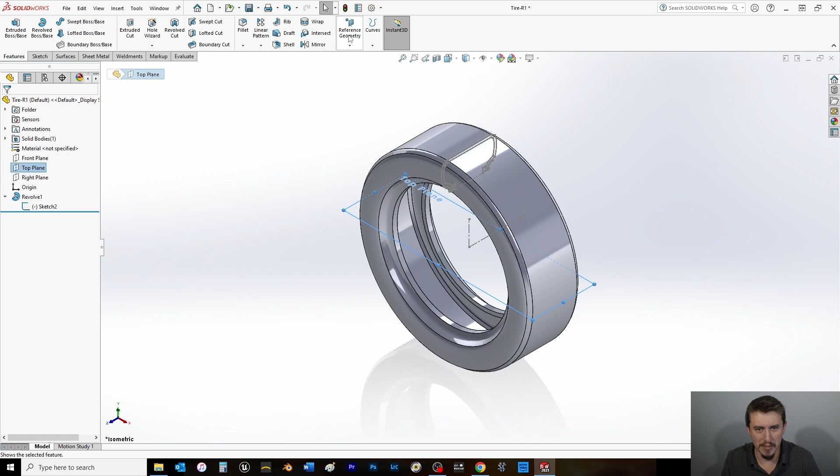Alright, so what we're going to do here is a little bit of tinkering with the wrap feature. So what we'll do is take the top plane, show the sketch, select the top plane from the feature tree, reference geometry, auxiliary plane, at this point here, Control 8 to bring it normal to, and let's make some tread.

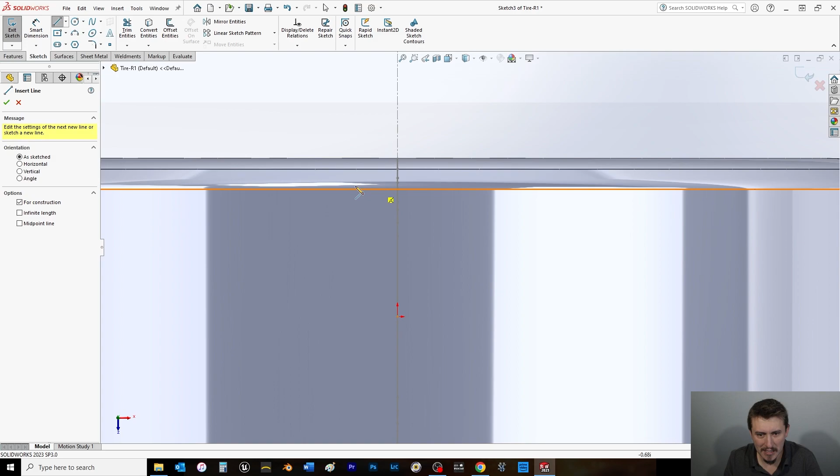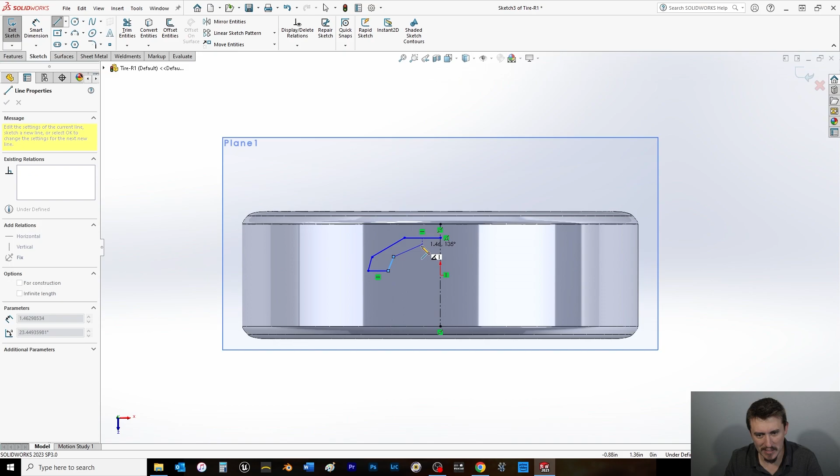First, we'll do a center line. And actually, what I'm going to do real quick is hide sketch 2 because I no longer need it or want it. Center line from here to here, like such. And then we'll do something like, how's about, say here to here to here to here. We'll fix that in just a moment. Don't you worry. And of course the line here, we gotta have a closed contour.

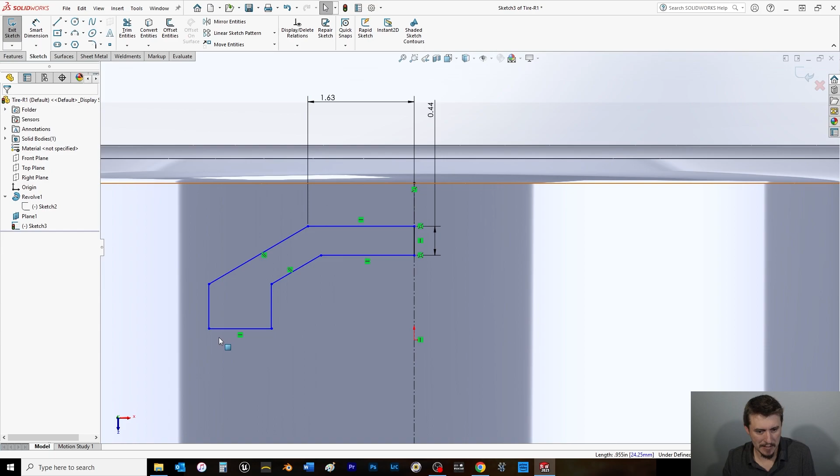Alright, so let's just say we'll just go 0.44. Make these equal. These can be a horizontal relation. Let's say these two are equal.

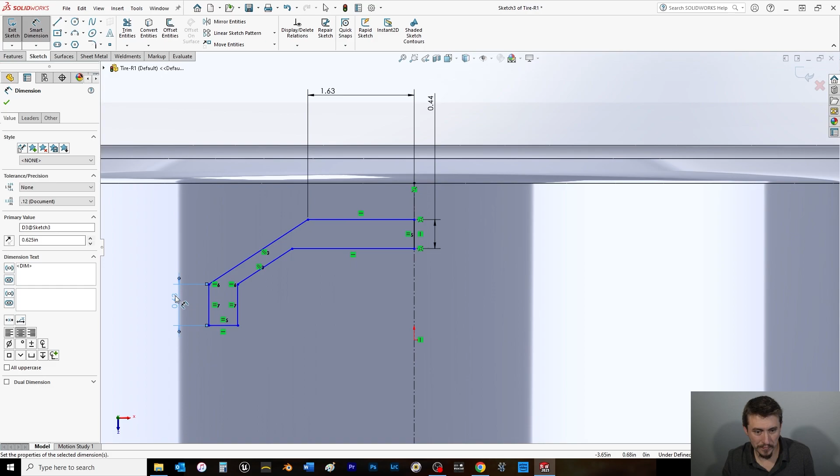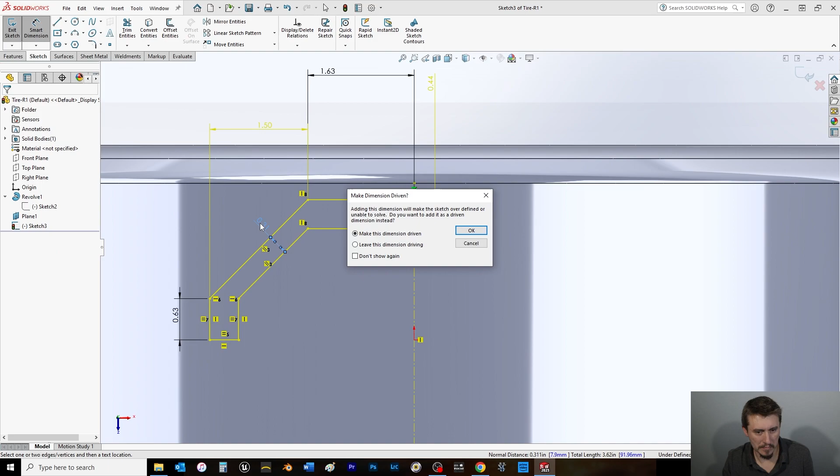Now we're getting somewhere. It used to be vertical. Vertical. Alright, now that we have this in place, we should be able to

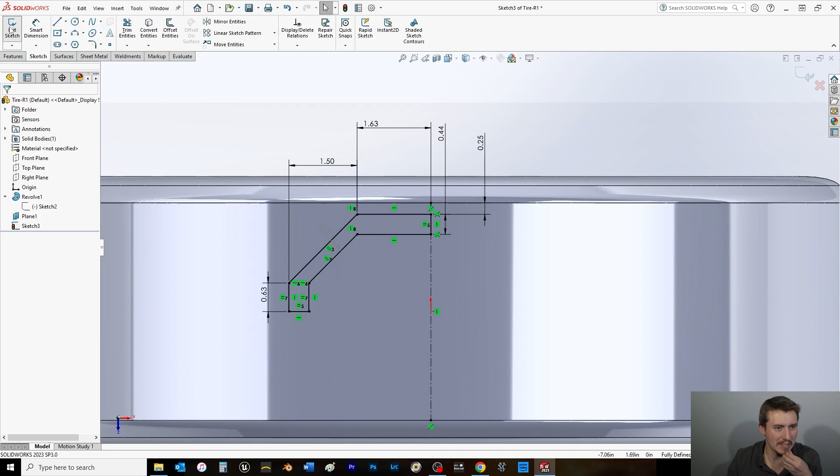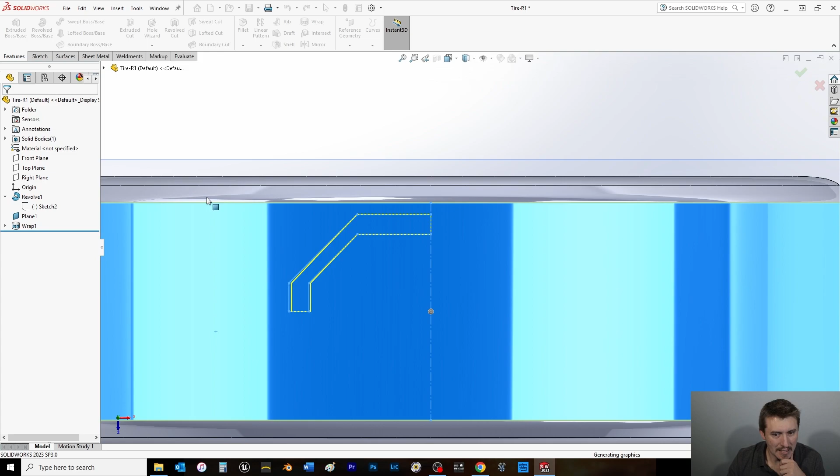go from here. We're going to do a quick test of how it goes. Exit the sketch, choose the sketch, come over to the features, wrap it, choose this face, looking good. We're going to extrude it. Should be emboss versus deboss. Point 25. Select OK, because we want a wrapped contour.

So in my previous video on Friday, I went over the wrap feature in greater detail. So check that video out. It's under the playlist, the unofficial tutorial section. But that's what we're implementing here, which is why I held off on doing this part to get this first.

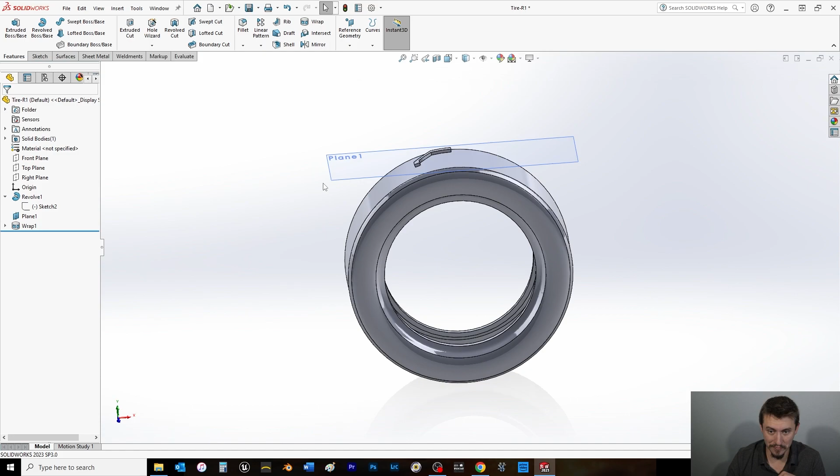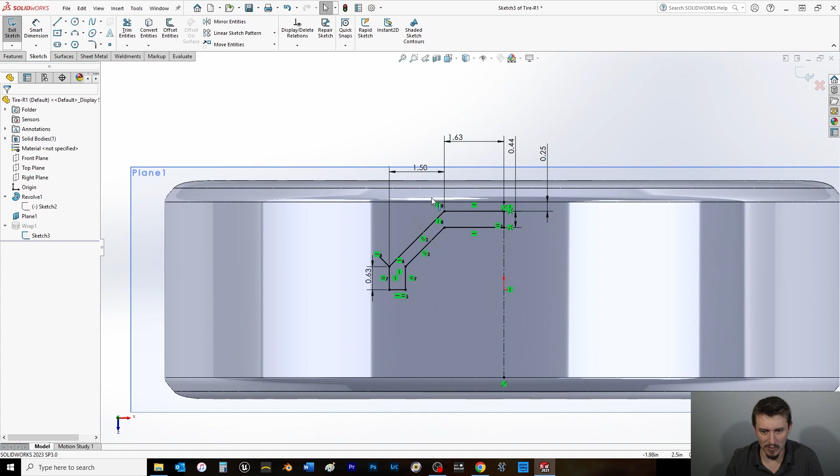So what we're going to do here is bring plane 1, Control 8. Plane 1 was not selected. Control 8 to bring it back normal to. So let's tune up this sketch a bit. This is a little wonky, if I'm being real here. So what I'm going to do, well, I mean, it's not terrible. So check this out.

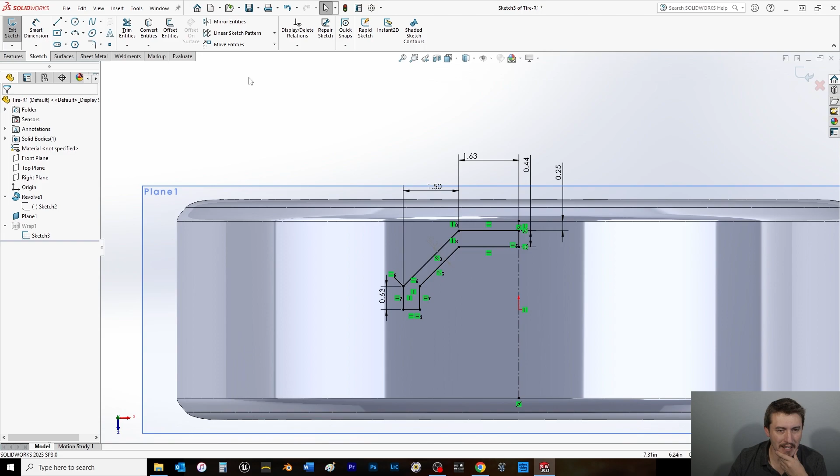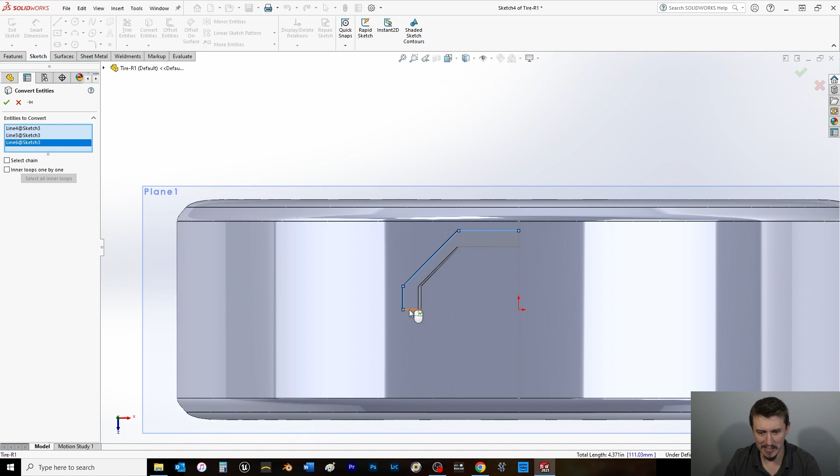Let's exit the sketch, choose plane 1, choose a sketch, and then what we'll do is make sketch 3 visible for this, and then we're going to do some funky ghetto borrowing here, right? So I'm going to convert entities, select this sketch. You'll see what I'm going to do here. And then click OK, and then here we're going to take a center line. This can go to infinity or the silhouette edge of the tire, it won't matter.

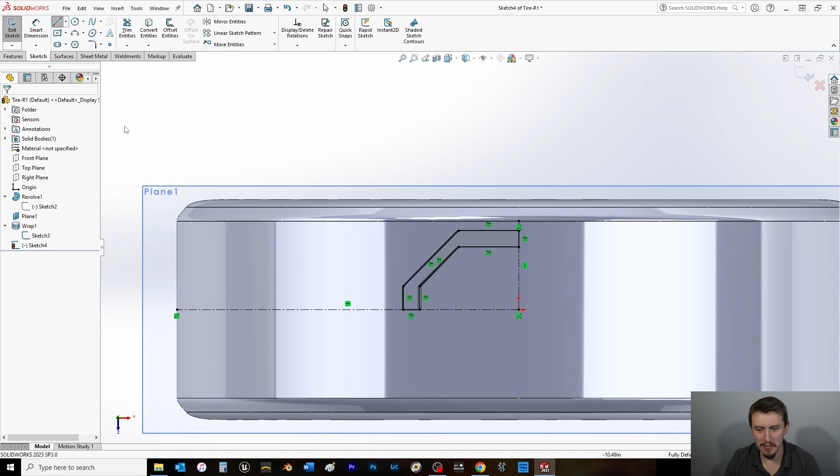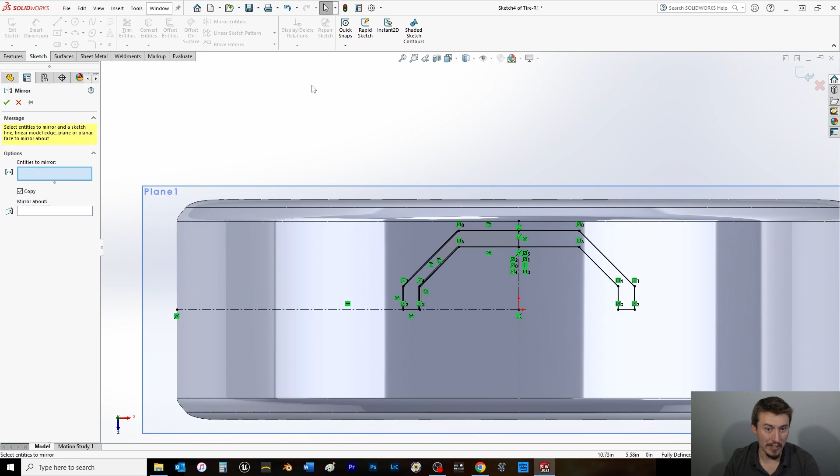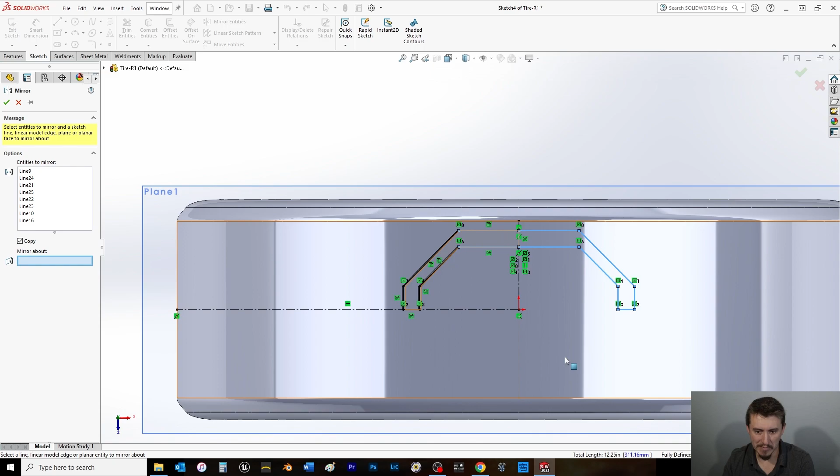And then I'm going to do 2 things here. Copy dot flip, so to speak. So we're going to mirror the entity, right, about, we don't want line 19 though, because we're mirroring about that. Okay, further, not yet, then we're going to do another mirror, select all these, select this. Oh, we don't want those 2 lines. No, sorry. Gotta make sure I'm in the right selection process here. I want this one and this one. And merged them, fine. I will deal with you accordingly.

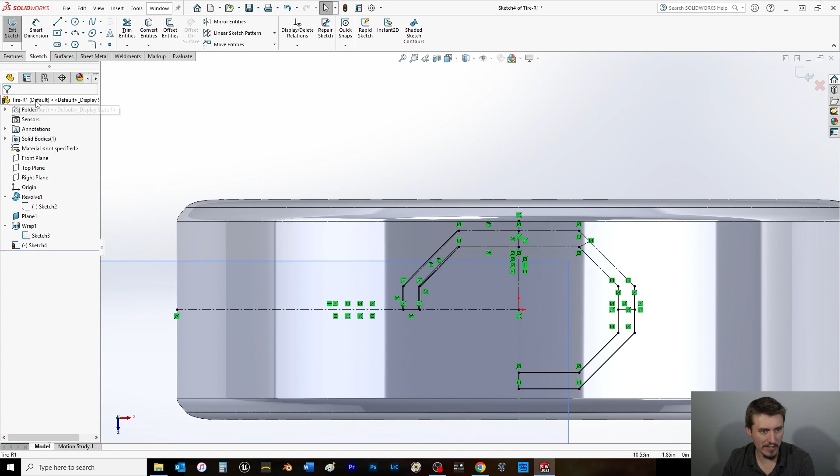Then we're going to take a trim entities here. And then I'm going to take all of this here and make it for construction. We need to get these 2 lines. I'm actually just going to straight up remove those for this particular purpose. Select this here. This is a quick and dirty way of doing it.

I have a lot more tutorials where we're going to refine processes, but in these Monday and Wednesday videos, don't expect me to use the exact correct way, because I want you to stay tuned for my Friday videos where we really deep dive into how to do certain sketches, relations, etc.

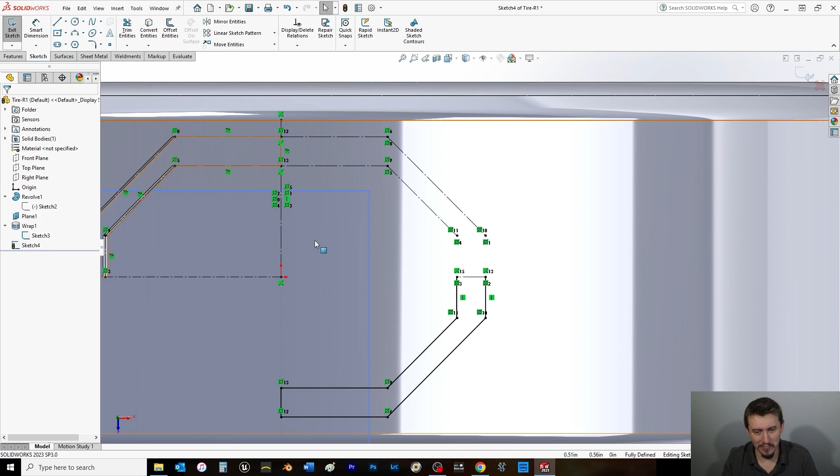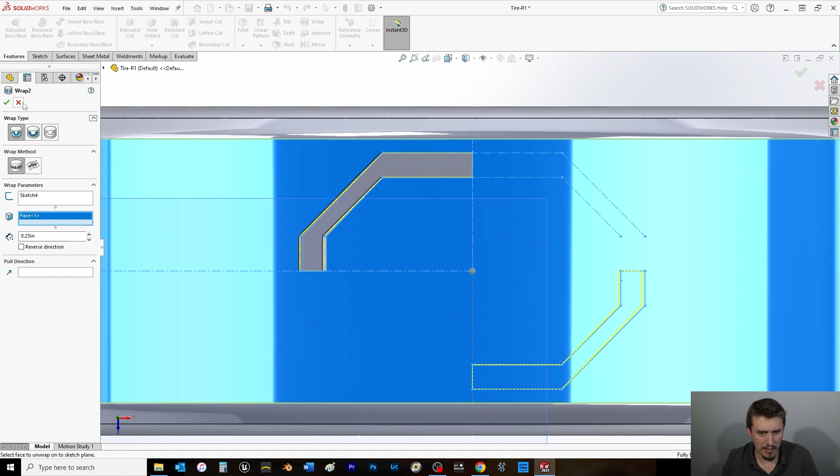So, go with this. All this should be good to go. And from here we can exit out because we have to do this again. And we're going to wrap. We're going to choose this here. Nope, we don't want to do that because it appears

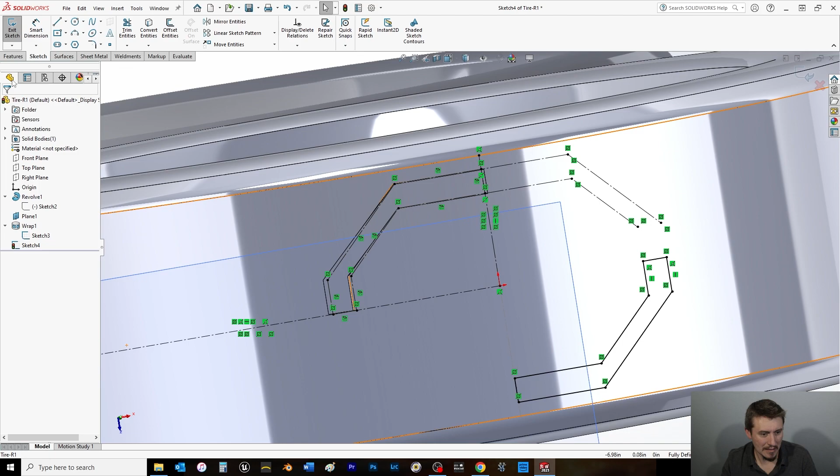Okay, just want to make sure that no other sketch is. Okay, so these are center lines. Should not choose that for wrap. But let's be sure of that. There we go. Ooh.

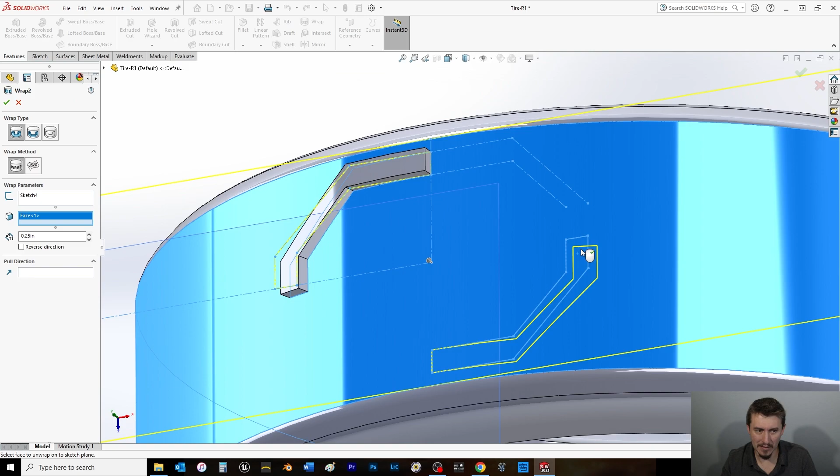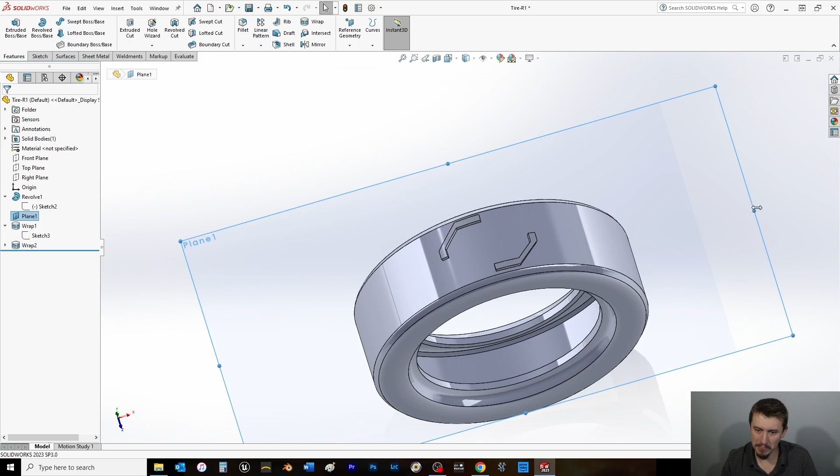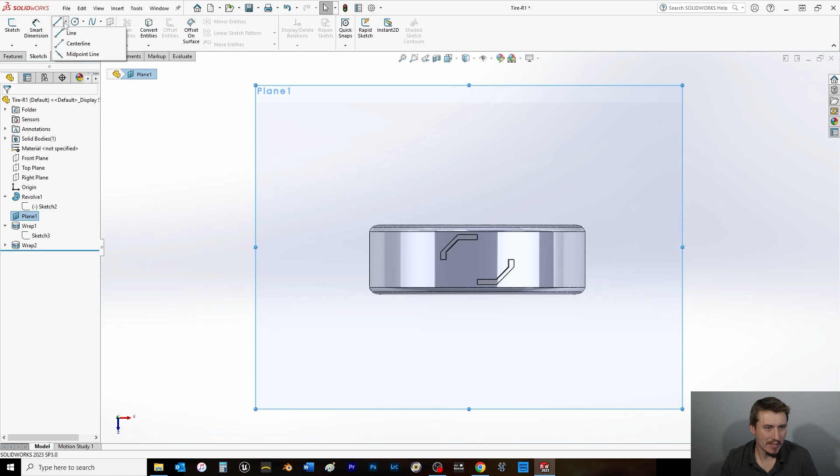Alright, so let's stretch the plane way out here, because we're going to use it again. We're going to bring it normal too, and then let's do a sketch as such. Do another center line. We'll do it off of these two pieces of tread here, and then we'll do something to the effect of a midpoint line. Why don't we do a diagonal contour, something like this. We're going to make that also a center line. And then from here, what we're going to do

is we're going to take a brief pause so I can grab a notepad. Alright, and we're back. I had to get some paper and a pen that worked so I could do some slight calculations in my head, so to speak.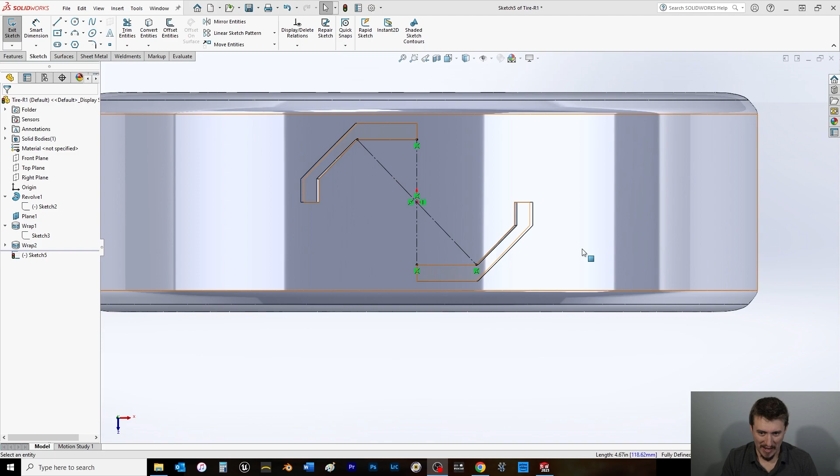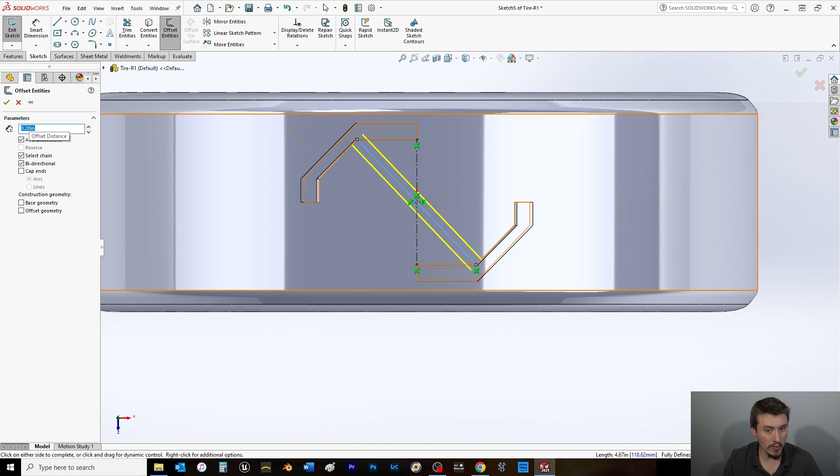Now what we'll do from here is, let's offset this, and let's go 0.4 on that as well. Did I? No, sorry. Let's do 0.4, so that's 0.2 because it's a dual offset. Okay, and then we're going to create a line here, and then we will simply mirror it, select the center line. No, we will not do that because we cannot. We need a diagonal line to do that. I can fix that.

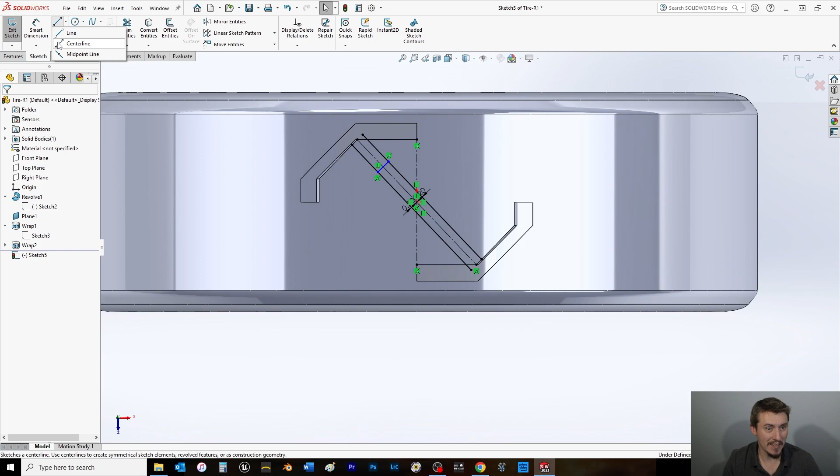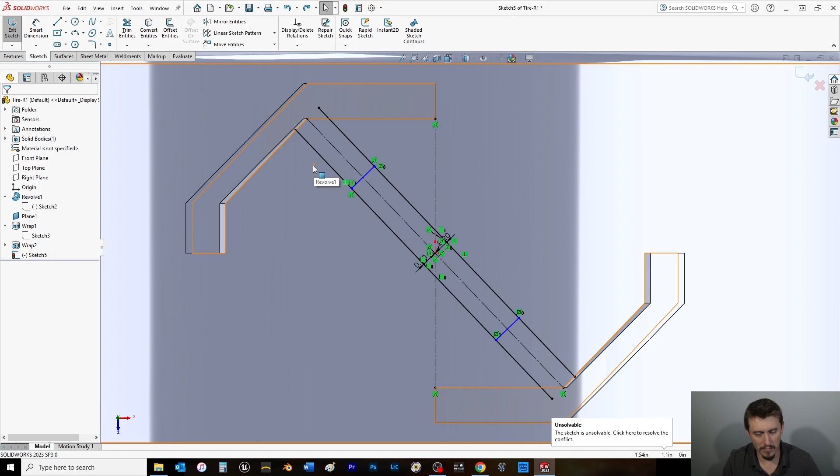So we choose a midpoint line, choose the midpoint, and go diagonally as such. Make that a center line. Then we go up here to mirror. Then we choose that. There we go. And then what we're going to further do is just love the trim entity feature. I don't want to trim the center line. What do we have going on here? Oh, let's do this first. Catch the dimension this way and make it 1.25.

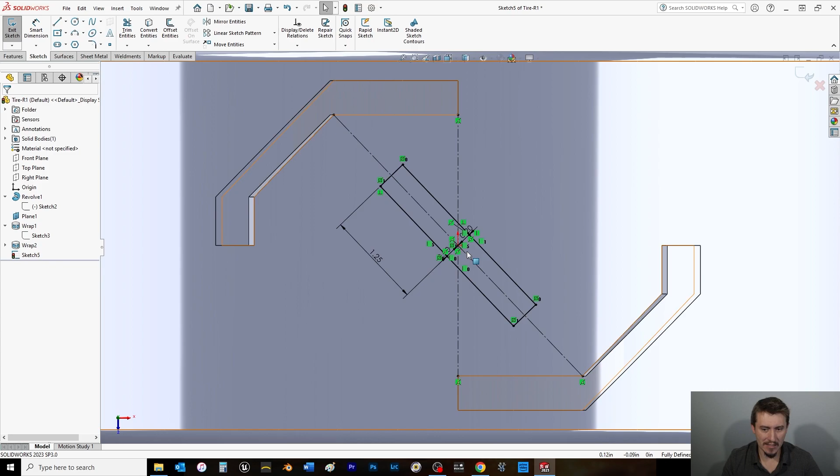Then mirror this about our center line we created. Trim the entity. Oh, I know you're not liking that right now. There you go. Now you love it. Now it's fantastic. Good, we got a closed contour. Excellent. That's for construction. We want that.

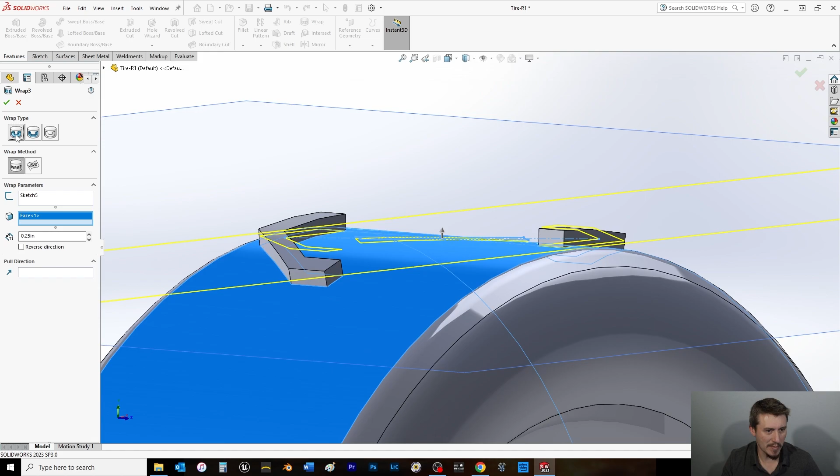We will exit the sketch, come to the feature tab, wrap it, select the sketch. 0.25. Make sure we're on the, we should have emboss and deboss. So this should be emboss. Perfect. Okay. So we've got a wild tread pattern, a very basic one. Let's hide the plane here for a moment. Then we're going to choose the

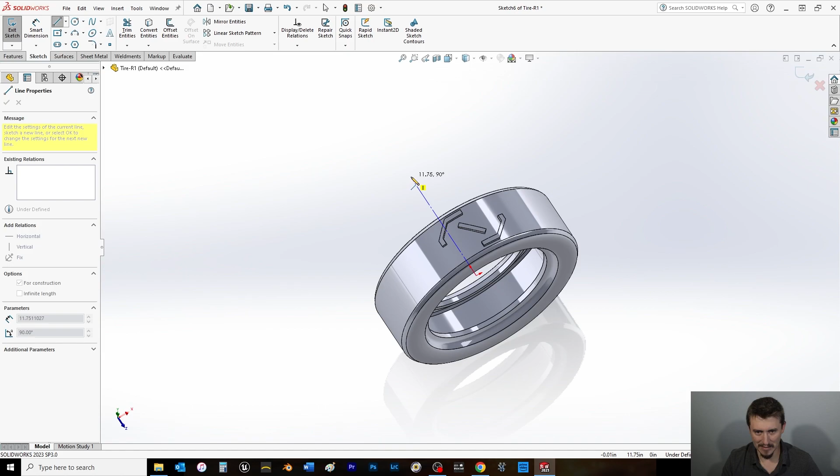top plane, do a sketch, and I'm going to do this from this kind of isometric. Make sure it's vertical. Now again, Control-8 to bring it normal to make sure that this is in fact a vertical relation. Infinite, fine with that. Exit that. Now we'll go to the features. Now what we're going to choose is a circular pattern. And now is where we're going to really break things.

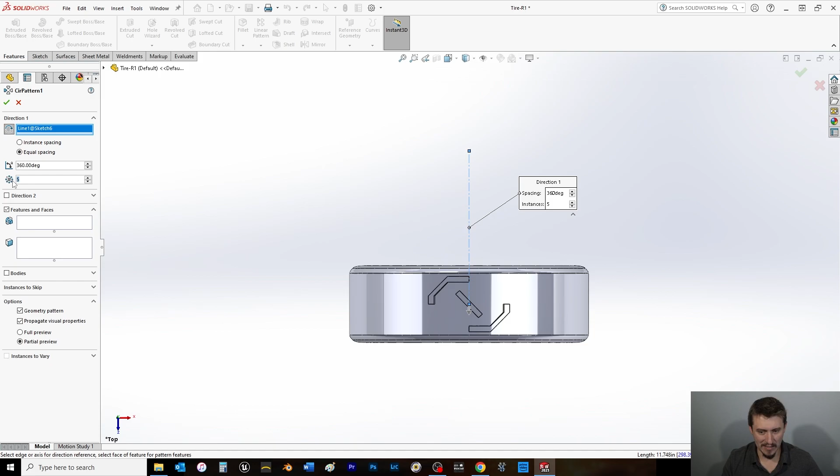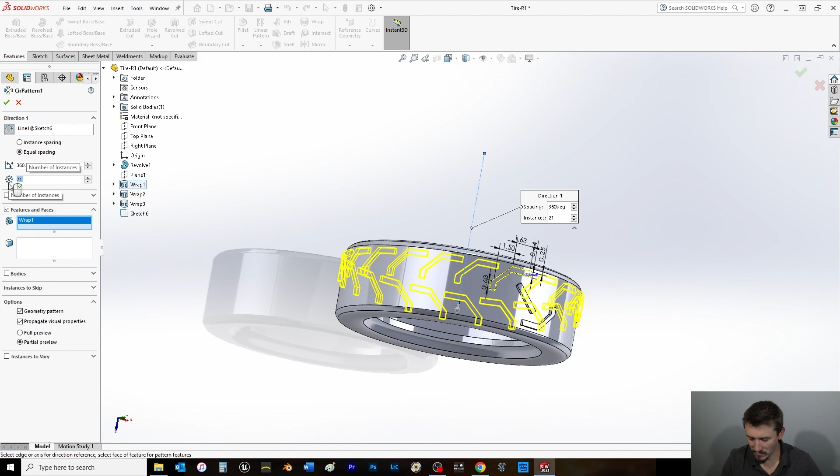So we're going to choose this as our axis of revolution, 360 degrees for our end condition, our angle. And our instances, we're going to speculate 20. Features, fly out, and we're going to choose only wrap 1 right now, just to see what it looks like and see if that's a good enough overlap. Let me try 21. 22. Let's go with 22. Okay, so we'll select that. And we have a collision. So that's all well and good.

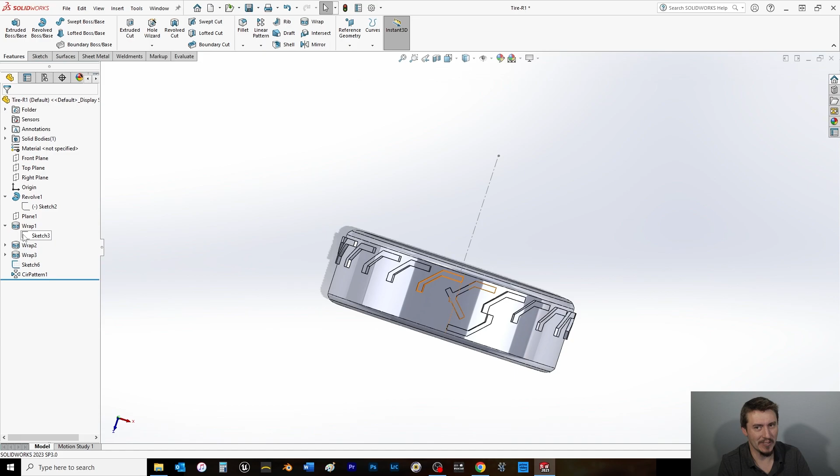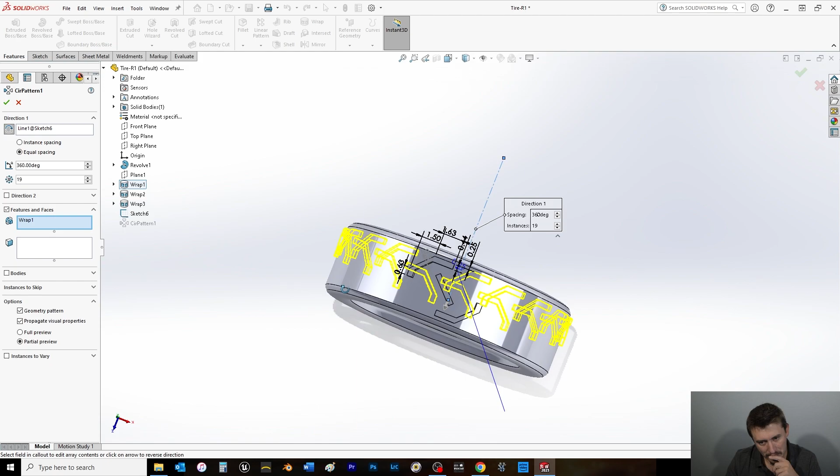This is purely made up. This is out of my head right now, just on the fly, because again, I want to make this a painting like Bob Ross right in front of your eyes, not necessarily pre-planned. So it's okay. We'll simply select our circular pattern feature here, edit that. Let's drop it back down to 20 and see if we have a collision. 19. So close. 18. Really? So how about 16? Okay, 16 is just gonna make it. Okay.

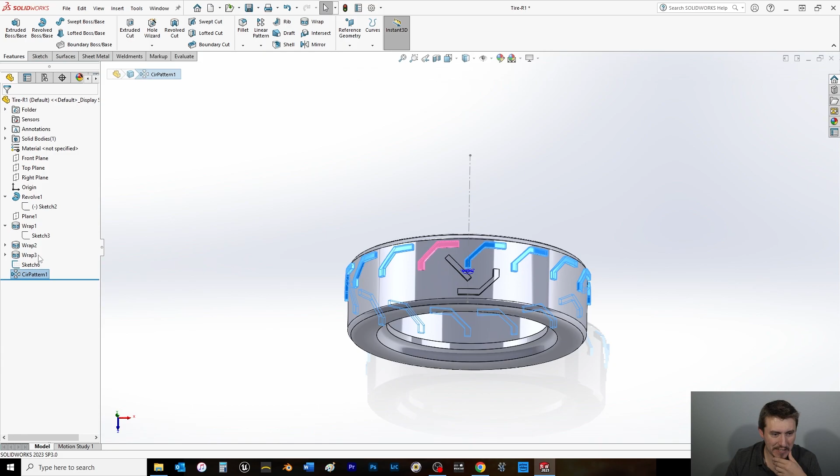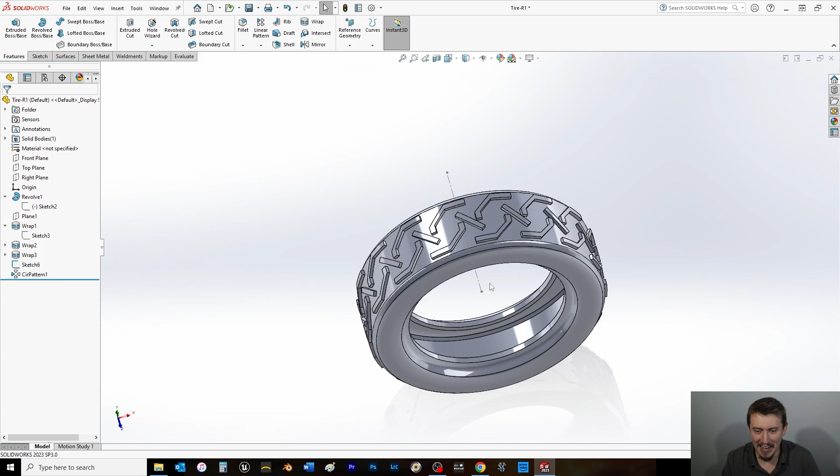So, with that, let's see if we could arguably grab all 3 of these. We might be able to. Look at that. This would be the most rough ride tire ever. This is almost like tractor tread. Yeah, this would not be a very smooth ride. We can all agree on that. But, you know, in snow it might do something interesting. So, we'll start with that for now.

And yeah, there's still a couple more things I want to do to this tire to call it good enough for now. Again, there are other parts throughout this entire series that I will probably come back and jazz up once I cover certain things on my Friday videos. I'm trying not to get too ahead of myself on these, but if it happens, it happens.

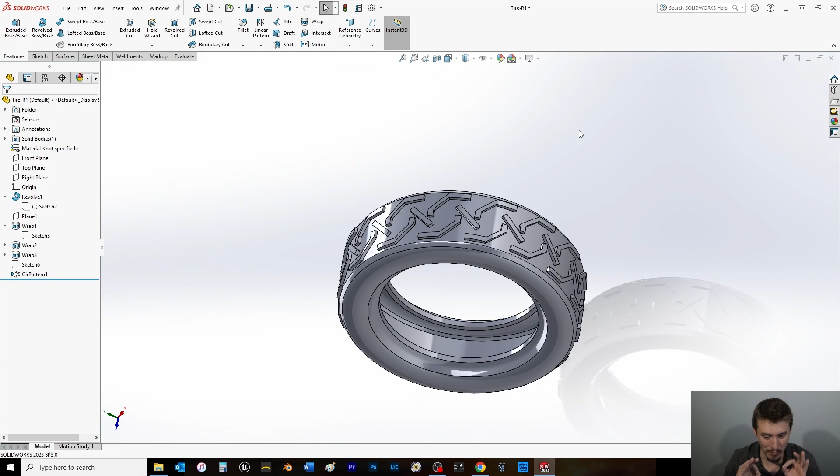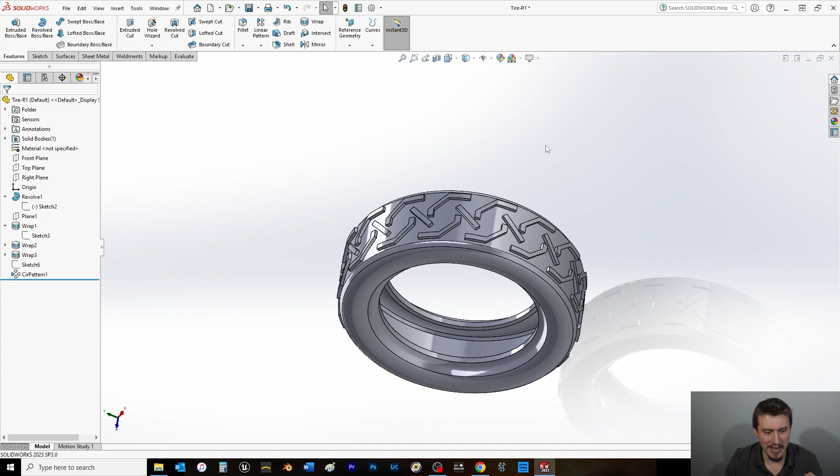So, again, this is touching on wrap and a circular pattern feature just a little bit here. I hope you learned something from that.